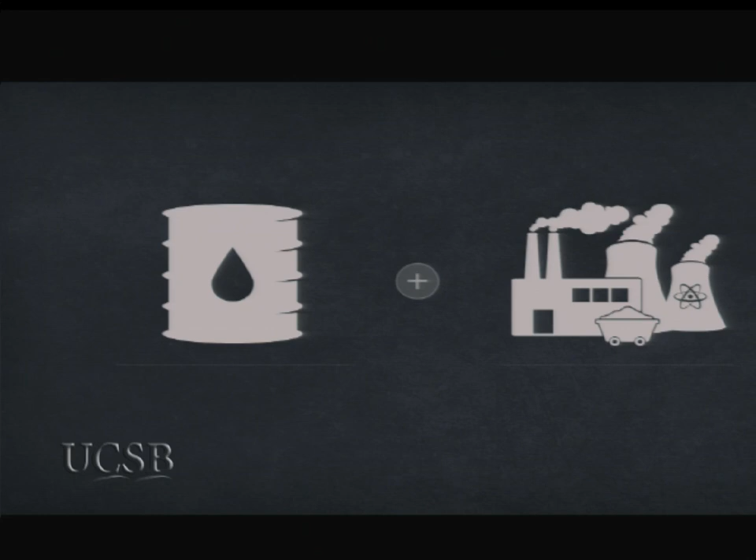So we need a new fire. And switching from the old fire to the new fire means changing two big stories about oil and electricity, each of which puts out 2/5 of the fossil carbon going in the air. But these two are distinct.

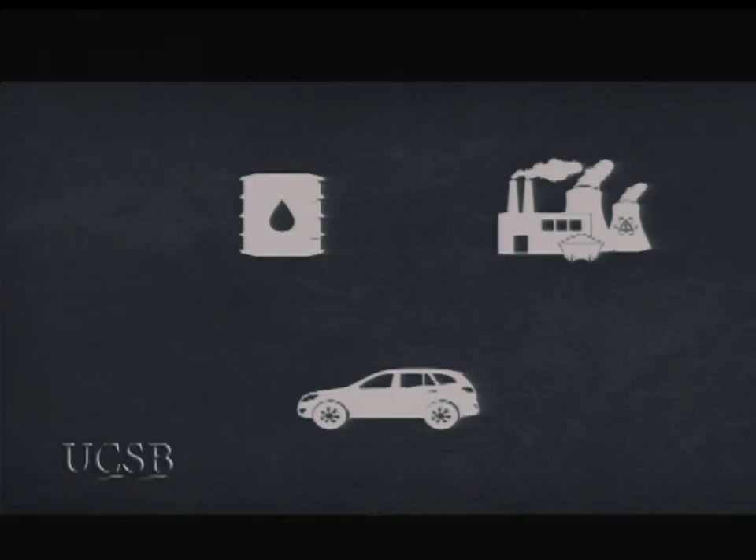Less than 1% of our electricity is made from oil, but almost half our electricity comes from coal. 3/4 of our oil fuels transportation. 3/4 of our electricity runs buildings. The rest of both runs factories.

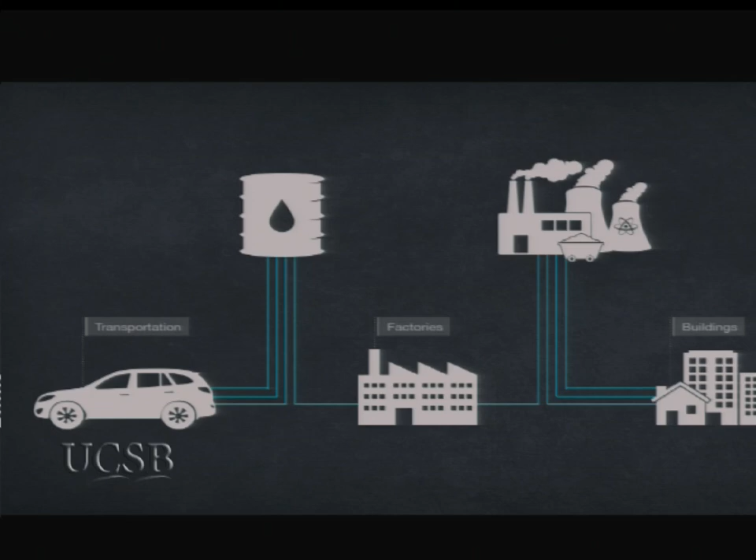So very efficient vehicles, buildings, and factories save a lot of oil, coal, and natural gas that can displace both of them. But today's energy system is not just inefficient—it is also disconnected, aging, dirty, and insecure, so it needs refurbishment.

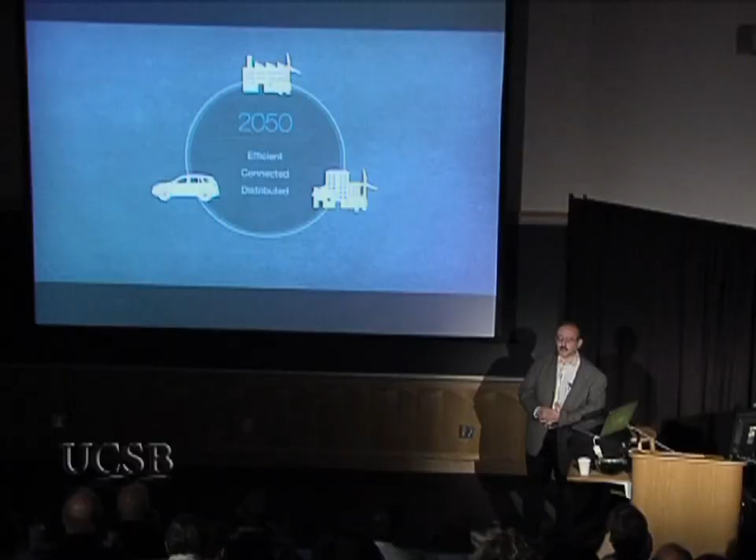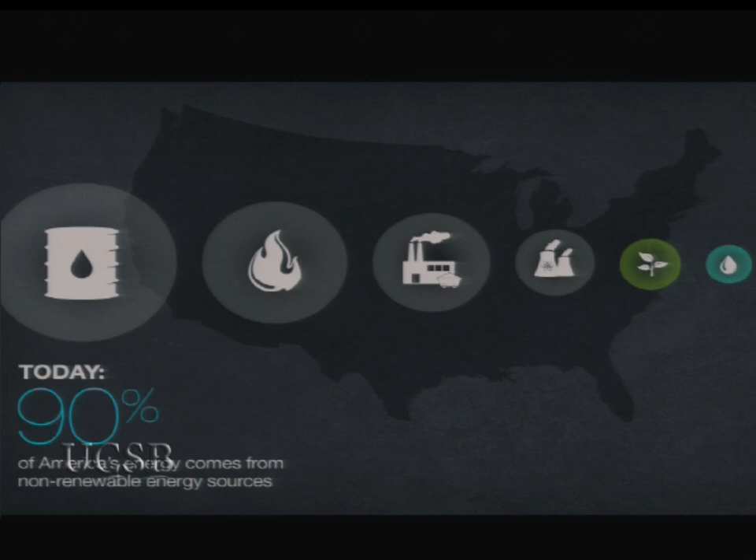By 2050, though, it could become efficient, connected, and distributed, with elegantly frugal autos, factories, and buildings, all relying on a secure, modern, resilient electricity system. We can eliminate our addiction to oil and coal by 2050, and use 1/3 less natural gas while shifting to efficient use and renewable supplies.

By 2050, this could cost $5 trillion less in net present value than business as usual, assuming that all external or hidden costs of getting and using the energy are worth zero—a conservatively low estimate. But this cheaper energy system could support a 158% bigger US economy, all without oil, coal, or nuclear energy.

Moreover, this transition requires no new inventions and no new federal taxes, subsidies, mandates, or laws, and no running through Washington gridlock. Let me say that again: I'm going to tell you how the United States can get completely off oil and coal, $5 trillion cheaper, with no act of Congress, led by business for profit.

So this transition will be designed and driven from the C-suite, not from K Street. It uses our most effective institutions—private enterprise co-evolving with civil society, sped by military innovation—to go around our least effective institutions. And whether you most care about profits, jobs, and competitive advantage, or about national security, or about environmental stewardship, climate protection, and public health, reinventing fire makes sense and makes money.

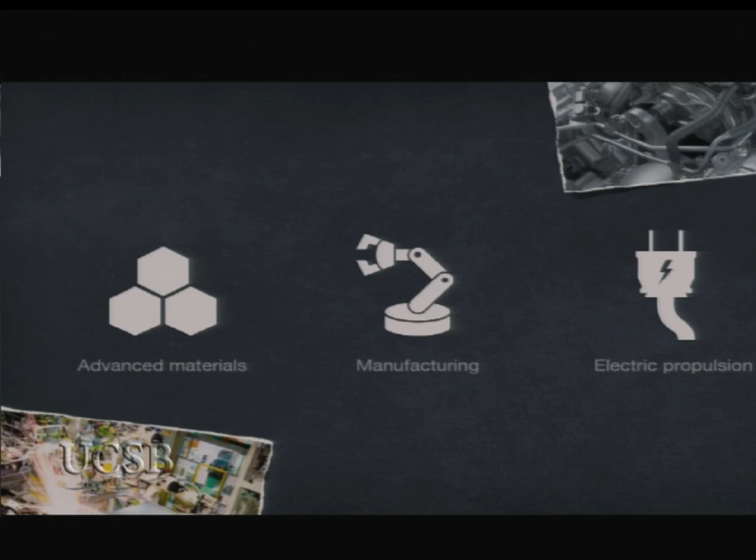That is, rebates to efficient new cars paid for by fees on inefficient ones. In the first 2 years, the biggest of 5 European feebate programs tripled the rate of improving auto efficiency.

The resulting shift to electric autos is going to be as game-changing as shifting from small refinements in typewriters to the dramatic Moore's Law-driven gains in computers. Of course, computers and electronics are now America's biggest industry, while typewriter makers have vanished.

So vehicle fitness opens a new automotive competitive strategy that can double the expected oil savings over the next 40 years, but also can make affordable the electrification that saves the rest of the oil. America could lead this next automotive revolution.

The current leader, though, is Germany. Last year, Volkswagen announced 2013 production of this 230-mile-a-gallon plug-in hybrid carbon fiber car. And BMW also announced 2013 production of this carbon fiber electric car.

They confirmed that its carbon fiber is paid for by needing fewer batteries, and their CEO said, 'We do not intend to be a typewriter maker,' because they can look across Munich to where Olympia used to make excellent typewriters. Audi, by the way, claimed it's going to beat them both by a year.

Now, there is still some interesting potential for American competitive advantage. I brought along, for example, a carbon cap that was made 7 years ago in 1 minute by an American process from one of our little spin-offs.

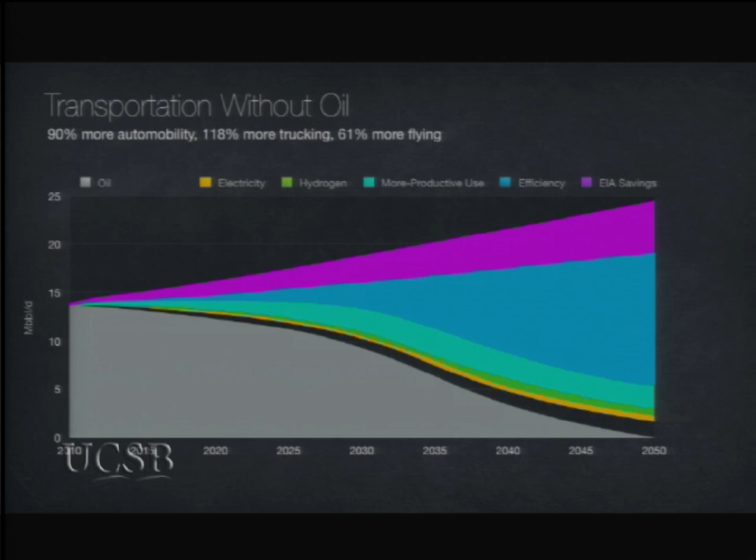So to get mobility without oil, we can first get efficient and then switch fuels. The magenta is the savings already baked into the government forecast. This big blue wedge is all the extra efficiency from modern materials, integrative design, electrification. This is the more productive use of vehicles. And then you don't need much fuel.

The 125 to 240 mile per gallon equivalent autos can use any mixture of hydrogen fuel cells, electricity, or advanced biofuels. Trucks and airplanes can realistically use advanced biofuels or hydrogen, or the trucks can even burn natural gas, but no vehicles will need oil. And the most biofuel we might need, 3 million barrels a day, can be made 2/3 from waste without using any cropland and without harming soil or climate.

Our team at RMI speeds these kinds of oil savings by institutional acupuncture. Where the business logic is congested and not flowing properly, we insert little needles to get it flowing properly, working with partners like Ford, Walmart, and the Pentagon. And in most of the 6 sectors that need to be transformed, this long transition is already well underway.

Indeed, 3 years ago, mainstream analysts were already starting to see peak oil not in supply but in demand. U.S. gasoline use peaked in '07. OECD oil use, all the rich countries, peaked in '05. Deutsche Bank 3 years ago forecast that world oil use could peak around 2016. So in short, oil is becoming uncompetitive even at low prices before it becomes unavailable even at high prices.

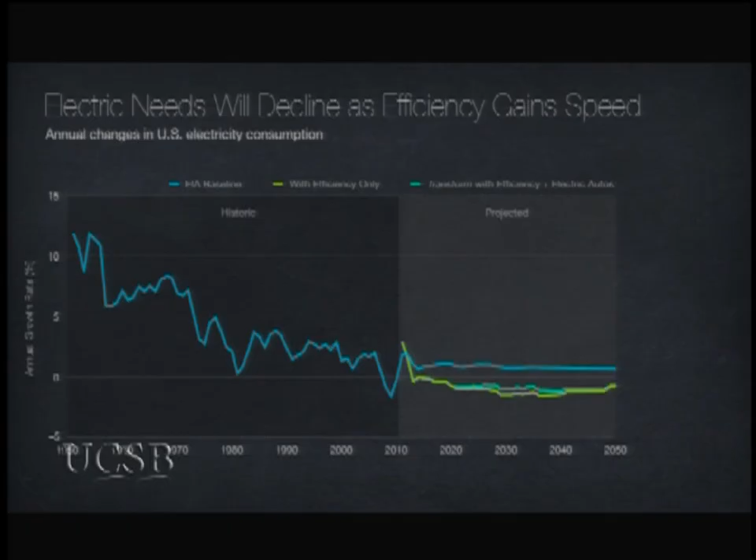But as efficiency in buildings and factories keeps growing faster, and ultimately grows faster than the economy, America's electricity use could start shrinking despite the slight extra use for electrified autos. And we can do this just by reasonably accelerating existing trends.

Over the next 40 years, the buildings that use 3/4 of our electricity can triple or quadruple their energy productivity, saving $1.4 trillion net present value with a 33% internal rate of return. That is, the savings are worth 4 times their cost. And industry can accelerate too, doubling its energy productivity with a 21% internal rate of return.

Making this possible is a disruptive innovation that we call integrative design, which often makes big energy savings cost less than small or no savings, yielding expanding returns, not diminishing returns. That's how our 2010 retrofit of the Empire State Building is saving over 2/5 of its energy.

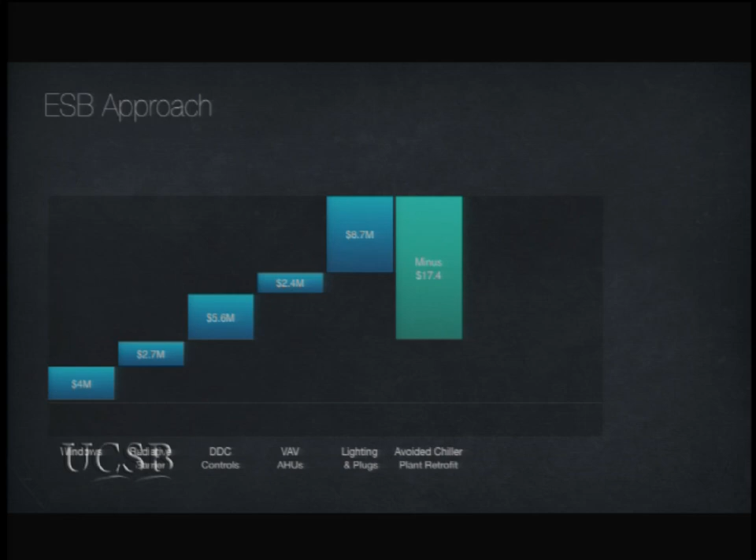Remanufacturing those 6,500 windows on site into super windows that pass light but block heat, plus better lights and office equipment and such, cut the maximum cooling load by 1/3. And then renovating smaller chillers instead of adding bigger ones saved $17 million that helped pay for the other improvements and cut the payback time to just 3 years.

An even deeper retrofit we now have underway at a big federal office complex in Denver is expected next year to make it probably the most efficient office building in the country, cost effectively, even though it's a difficult 48-year-old building that faces the wrong way, and the retrofit has to include full asbestos abatement, federal blast resistance retrofit, and historic preservation.

The owner, the General Services Administration, is the nation's largest landlord, managing $500 billion worth of buildings, or about 3% of commercial floor space.

Or let's go to a small building. My own house high in the Rocky Mountains, where it used to go to minus 47F, minus 44C, helped inspire 32,000 passive buildings in Europe that need and have no heating equipment, but maintain the same or better comfort at about normal construction cost. And they don't need to look like this to work like this.

Now let's go into this atrium, and inside we're now ripening the last 5 of 41 banana crops so far. You can see number 37 hanging up there, with no furnace.

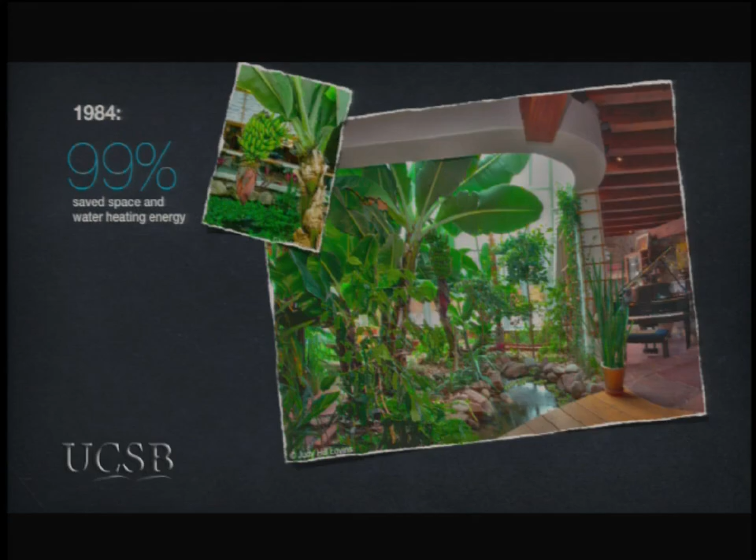In 1984, this house was saving 99% of its space and water heating energy and about 90% of its electricity, all with a 10-month payback. Today's technologies, which we've just retrofitted, are even better. Soon I'll be able to tell you how much better.

We're commissioning the software to monitor our 300 data streams coming in. Trouble is, the monitoring equipment seems to be using more electricity than the lights and appliances it's measuring.

This design approach works in any climate. We've used it in ordinary looking tract houses in California in a PG&E experiment to get rid of cooling equipment with better comfort and lower construction cost, up to 115F, 46C. And a friend used it in Bangkok to save 90% of his air conditioning with better comfort and normal construction cost. Probably everybody in the world pretty much lives between his climate and my climate.

The key is integrative design that gives multiple benefits from single expenditures. You can see, for example, a white arch wrapping around the top there. That has 12 functions, but only 1 cost.

Integrative design can also increase the $500 billion of conventional energy savings in industry. Dow has already captured $19 billion of savings on a $1 billion investment, but there's lots more to do.

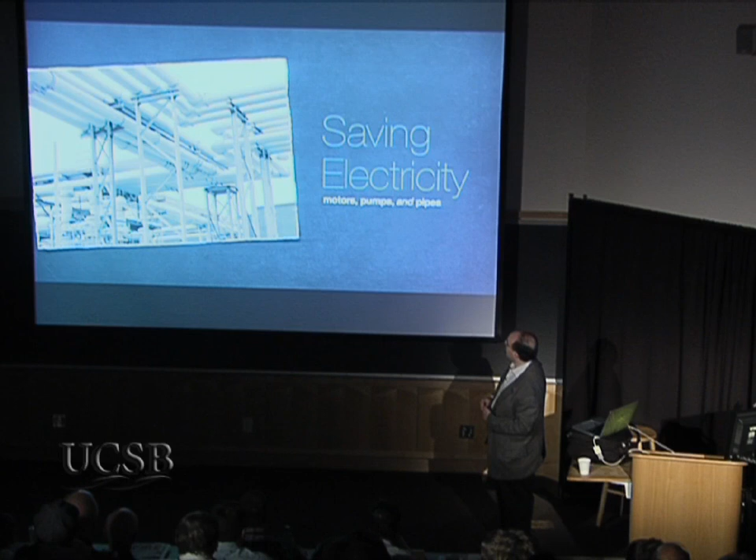But first, we ought to be capturing bigger, cheaper savings that are normally ignored, are not in official studies, are not in the textbooks. For example, pumps, the biggest use of motors, move liquids through pipes. But a standard industrial pumping loop was redesigned to save at least 86% of its pumping energy, not by getting better pumps or motors, but just by replacing long, thin, crooked pipes with fat, short, straight pipes.

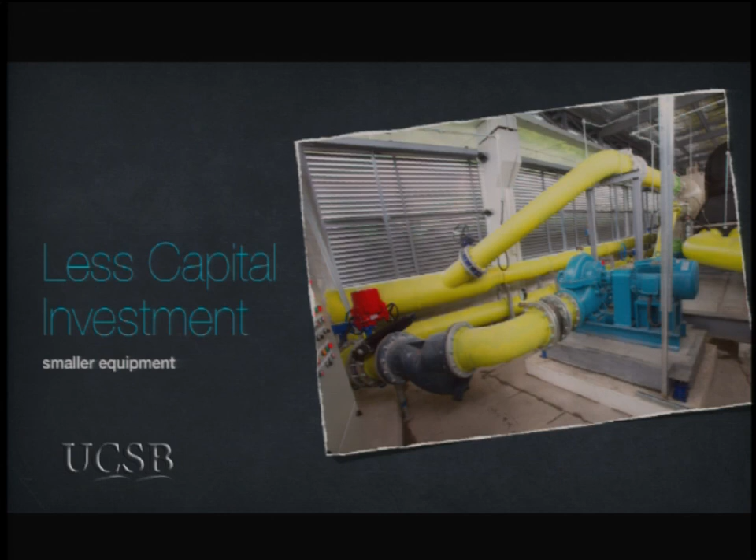That also shrinks the pumping equipment and its capital costs. So this is not about new technology. Integrative design is just rearranging your mental furniture to ask different design questions in a different order. So what does such savings mean for the electricity that's 3/5 used in motors?

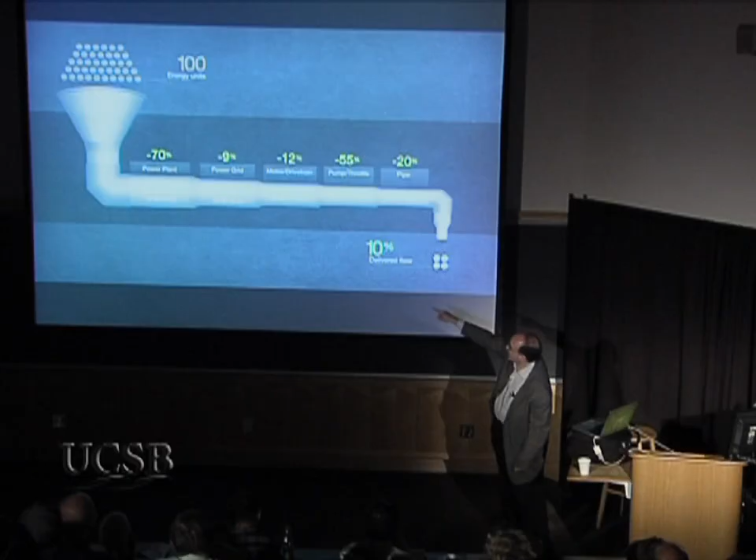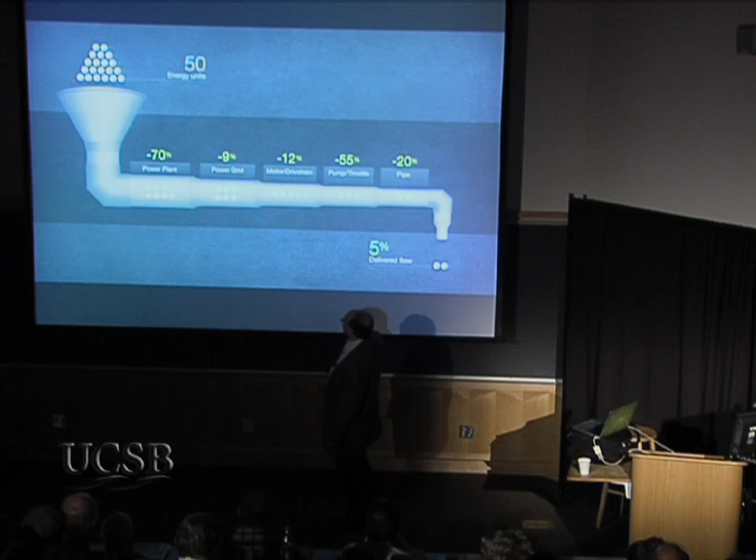Well, from the coal burned in the power plant through all those compounding losses, only 1/10 of the fuel energy actually comes out the pipe as flow. But now let's turn those compounding losses around backwards into compounding savings from right to left. And every unit of flow or friction that we save here in the pipe goes back to save 10 units of fuel and cost and pollution and what Hunter Lovins calls global weirding back at the power plant, while also making the upstream components smaller and therefore cheaper.

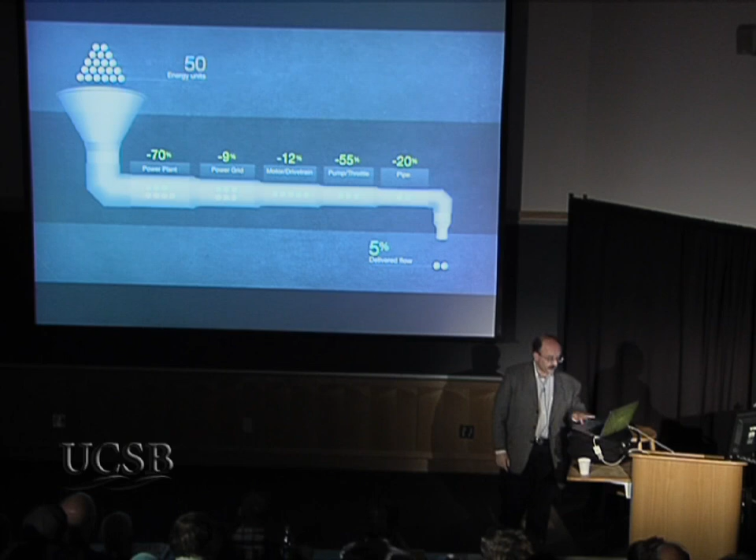Our team has lately found such snowballing energy savings in over $30 billion worth of industrial redesigns, from data centers and chip fabs to mines and refineries. Typically, our retrofit designs save about 30 to 60% of the energy with a 2 or 3 year payback, and our new facility designs save more like 40 to 90% with generally lower capital cost.

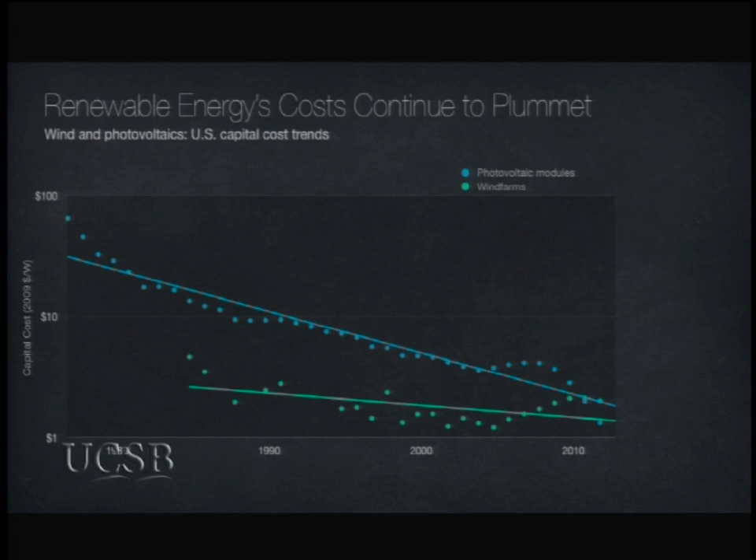Now, needing less electricity would ease and speed the shift to new sources of electricity, especially renewables. China is leading their explosive growth and their plummeting costs, shown here for photovoltaic modules and wind farms. In fact, the photovoltaic costs have just dropped off the bottom of the chart. Solar and wind power are often marketplace winners today, with a lot of other consequences. Europe now has 1.1 million renewable energy jobs it didn't used to have. The big winner, Germany, now has more solar workers than America has steel workers.

Already in about 20 states in this country, private entrepreneurs can put those cheap solar modules on your roof with no money down and beat your utility bill. Combining such unregulated products could ultimately add up to a virtual utility that bypasses your power company, just as wireless phones bypass the wireline phone companies. That sort of thing gives utility executives the heebie-jeebies and venture capitalists sweet dreams. And such competitive threats are real.

Half of the world's new generating capacity installed every year starting 2008 has been wind, photovoltaics, and other renewables, the majority lately in developing countries. In fact, in 2010, renewables other than big hydro got $151 billion of private capital, and their total installed capacity actually pulled ahead of that of nuclear power with a half-century head start, by adding 60 billion watts, only slightly more than the 50 billion watts a year that the photovoltaic industry at the end of last year was able to manufacture every year, and that number's been going up 60 or 70% a year.

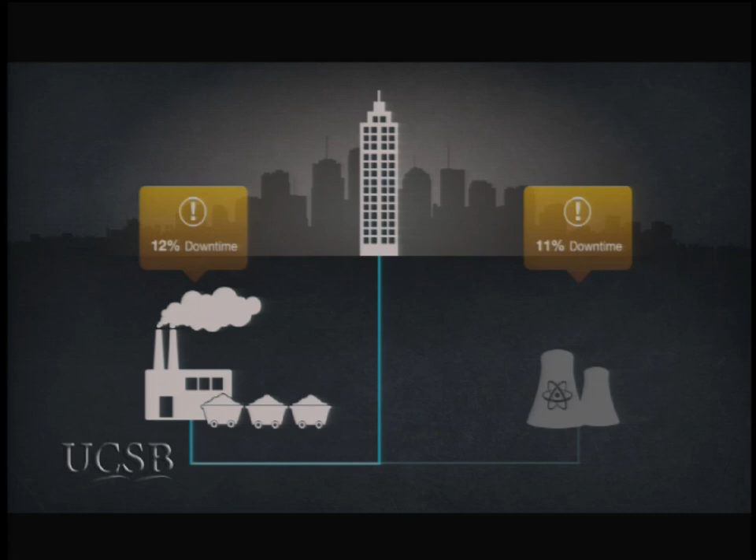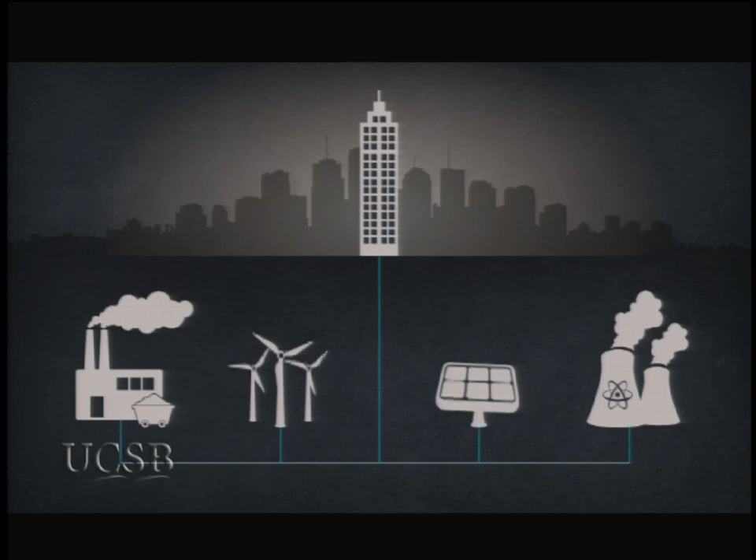And in exactly the same way, grids can handle the forecastable variations of solar and wind power. So hourly simulations show how largely or wholly renewable grids can deliver highly reliable power when they're forecasted and integrated and diversified both by type and by location.

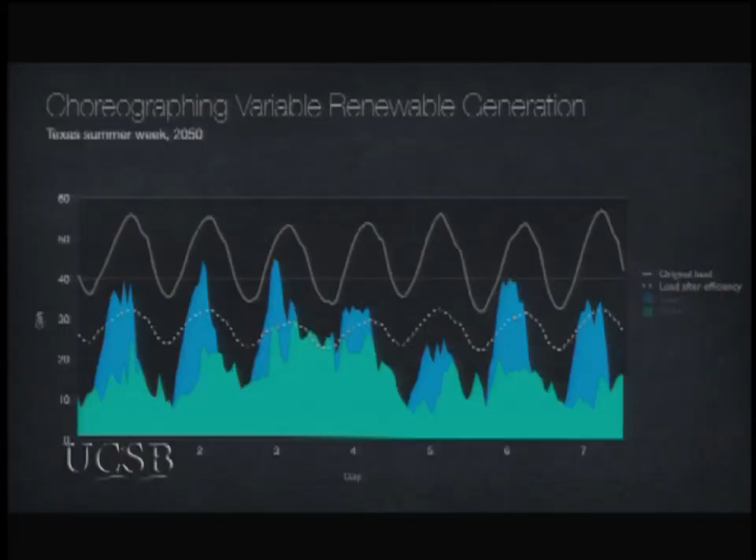That's true both for continental areas like the US or Europe and for smaller areas embedded within a larger grid. For example, the isolated Texas grid's summer electric load gets smaller and a lot less peaky if you add profitable efficiency. Then you can install wind and solar power, meeting in this case 86% of the annual electricity needs, but as you see, not exactly matching the load, sometimes too much, sometimes too little.

Well, you can then complement those variable resources with 14% from dispatchable renewables. That's all the rest, like geothermal, small hydro, solar thermal electric, or in magenta here, feedlot biogas burned in existing gas turbines.

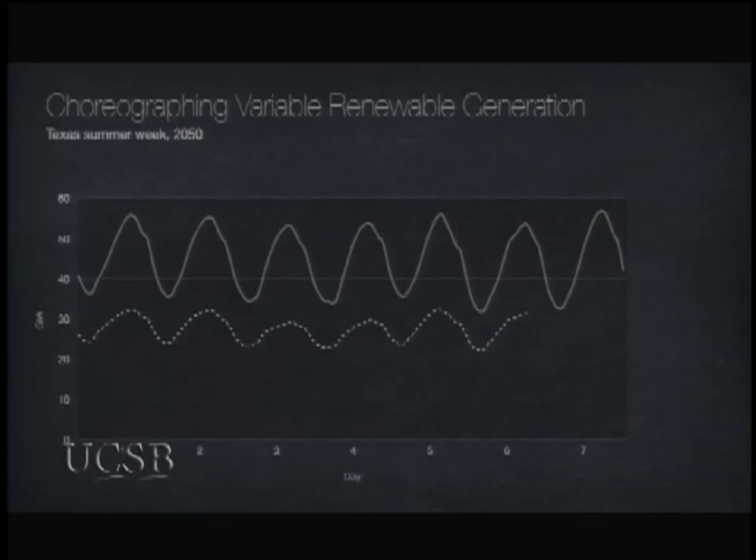And this 100% renewable supply, 86% variable in this case, 14% dispatchable, can then be matched exactly to the load via ice storage, air conditioning, smart charging and discharging of electrified autos, oops, go back there, and unobtrusively flexible demand, which is the last color to show up. Just a second, and we'll see what color it is. I think it's going to be orange.

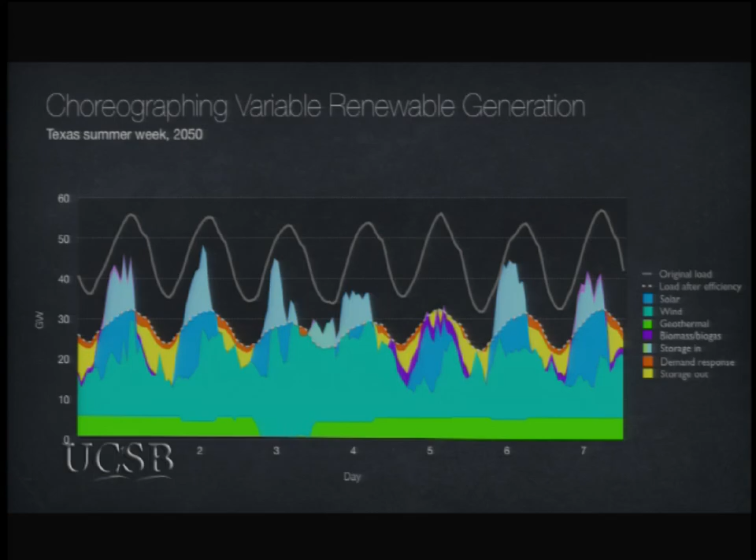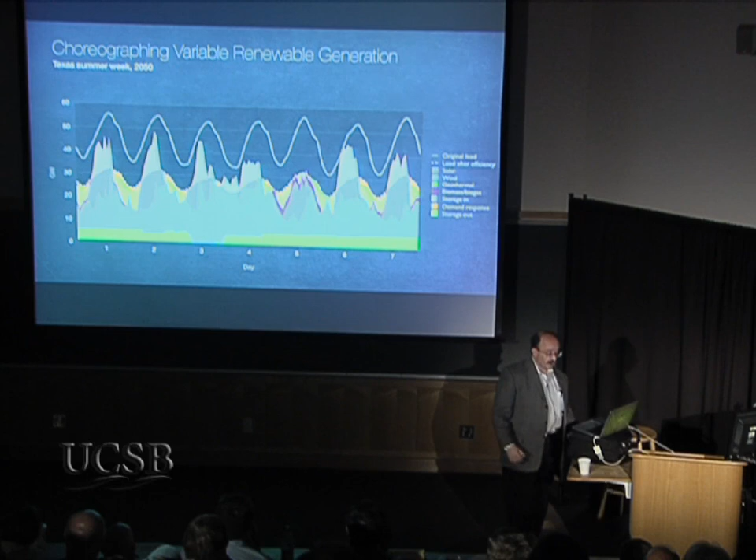So sometimes we're using excess renewable capacity to charge cars or make ice in air conditioners, and at other times we're discharging that. So those are in kind of light blue and yellow respectively. And then the orange is the unobtrusively flexible demand. You wouldn't know it's happening, but it helps match everything up, so all the moving parts fit together. And some utilities are already doing that choreography and integrating variable renewables in that way.

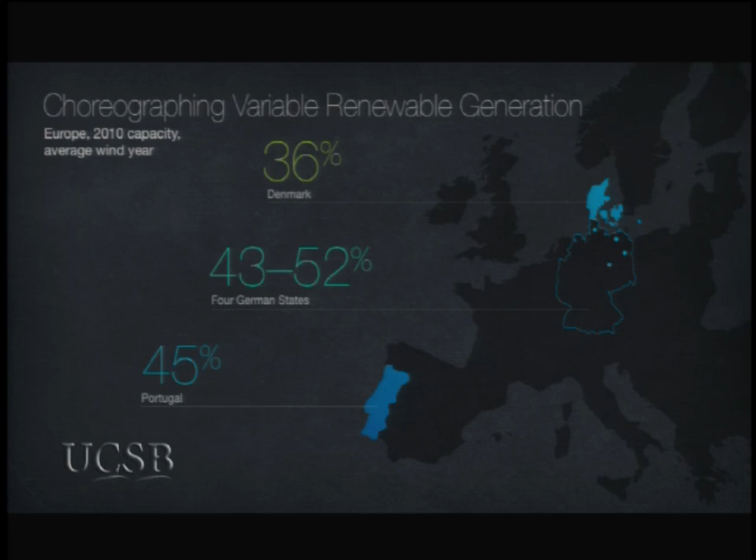In 2010, 4 German states were 43 to 52% wind powered. Portugal was 45% renewable powered, Denmark 36%. And now European experience supports a transition over decades to largely or wholly renewable electricity for the whole European Union.

In this country, our aging, dirty, and insecure power system has to be rebuilt anyway by 2050. And whatever we replace it with is going to cost about the same, roughly $6 trillion net present value to power the country for the next 40 years. That's whether we buy more of what we've got now, or new nuclear and so-called clean coal, or renewables that can be more centralized or more distributed.

But these 4 futures at about the same cost differ profoundly in their risks around national security, fuel, water, finance, technology, health, and climate. For example, our over-centralized grid is vulnerable to cascading and essentially economy-shattering blackouts caused by solar storms, bad space weather, or other natural disasters, or physical or cyber attack.

But that blackout risk disappears, and all the other risks are best managed with distributed renewables reorganized into local microgrids that normally all interconnect but can stand alone at need. That is, they can break apart fractally, recombine seamlessly, and still keep things going. So at about the same cost as business as usual, this grid architecture already being successfully piloted in Denmark and applied in Cuba could maximize national security and customer choice and entrepreneurial opportunity and innovation.

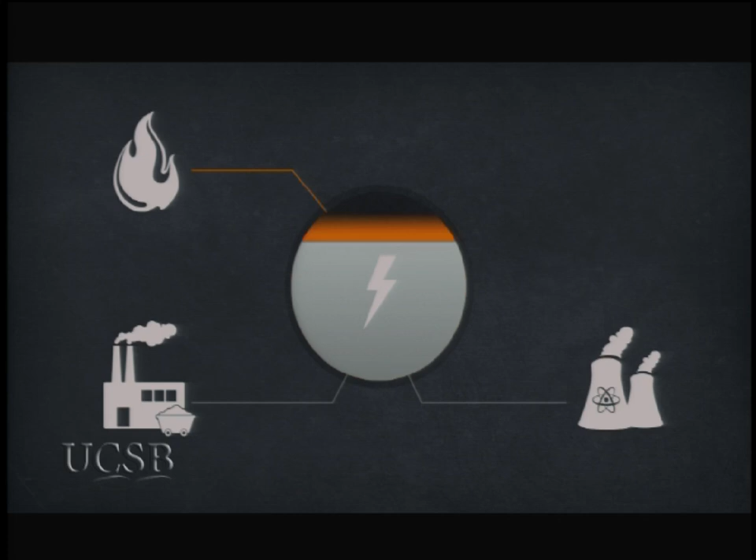Together, efficient use and diverse, dispersed renewable supply are starting to transform the whole electricity sector. Traditionally, utilities build giant coal and nuclear plants and a bunch of big gas plants and maybe a little efficiency and renewables. And those utilities were rewarded, as they still are in 36 states, for selling you more electricity, just as dumb as it sounds.

But now, especially where, as in this state, regulators instead reward the utilities for cutting your bills, the market is shifting massively towards efficiency, renewables, demand response, cogeneration, and ways to blend them all together reliably with less transmission and with little or no bulk electricity storage. So our energy future is not fate, but choice, and that choice is very flexible.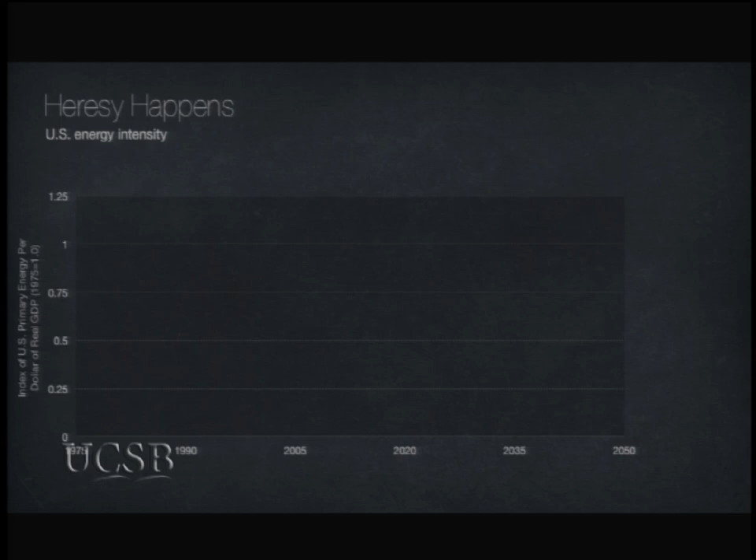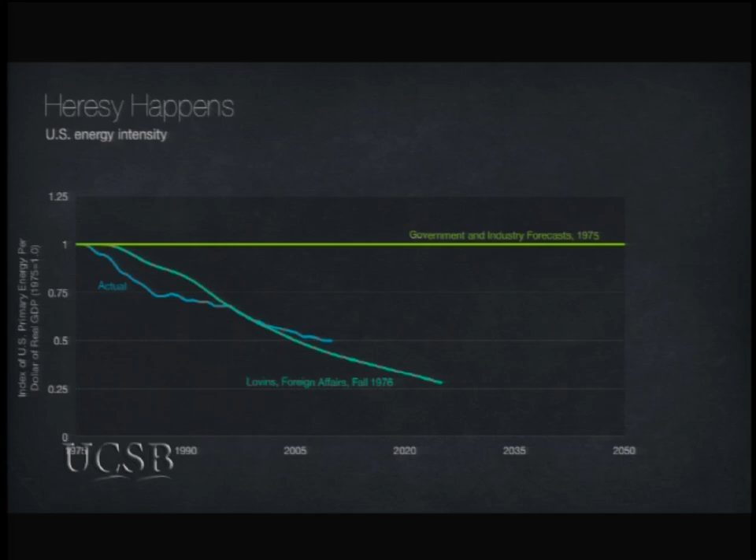In 1976, for example, government and industry agreed or insisted that the energy used to make $1 of GDP could never go down. I heretically suggested in a Foreign Affairs article that it could drop several-fold. That is what happened. It's dropped by half so far. But today's far more powerful technologies, integrative design, and maturing delivery channels can now triple energy productivity again, even cheaper.

So to solve the energy problem, we just needed to enlarge it. The results may at first seem incredible, but as Marshall McLuhan said, only puny secrets need protection. Big discoveries, he said, are protected by public incredulity.